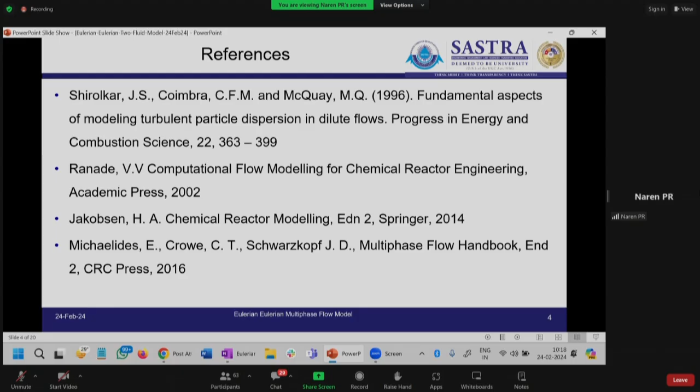With this pre-information, here's a quick outline of what I'm planning for the day. I'll recap the relevance of CFD and what you've learned so far, talk about what multiphase flows are, touch on what Professor Raghavendra covered yesterday about different approaches for multiphase flows, then go directly into Eulerian models, briefly cover what an interface is, and then the framework for simulating the Eulerian model. The idea is to give you a flavor of simulating multiphase flows in an Eulerian context.

So during this course of 5 days, are you fine with the concept of continuum? Do you understand what continuum is? This can be interactive, otherwise I may not be able to see the chat, since I'd have to check it on another system, which I don't want to do right now. So feel free to unmute and speak in between, at least one or two of you. I think the concept of continuum is clear.

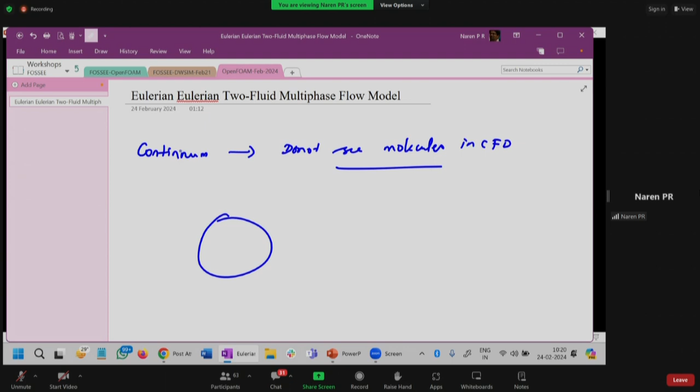So the first thing we should name is the continuum, which means we do not see molecules in CFD. So if you have a system filled with water, that means we see the complete space as filled.

We are not seeing this as molecules. This molecular picture is something that we do not see. This is what is the concept first of continuum.

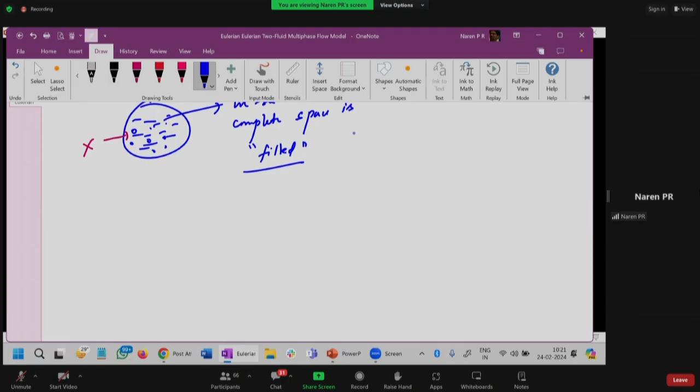So we should know that what we are seeing is actually a space that is completely filled with the matter. And typically we are talking about the phase that is filled with the fluid matter. This can be gas or liquid. But eventually, even for solid, that means we are seeing only continuous thing, right? That's the starting thing which I want to emphasize.

Now, how is this continuum found out? This is by Knudsen number. Are you aware of what this means, lambda by L? Any idea of lambda by L, or you want me to tell what is lambda by L? Yes sir, okay, so I am getting a response, so that's nice.

So that means how is continuum decided? It is decided by Knudsen number. Now one can write as L by lambda or lambda by L. This is like mean free path. And this is the characteristic dimension of the system, right?

Now, based on if Knudsen number, which is lambda by L, suppose if it's much, much greater than 1, that means you have a large dimension and mean free path is very less, then that means you will see it as continuous. That is what happens in the room.

In the room where we are sitting, we see the room to be continuously filled with air, filled with nitrogen and oxygen. You don't see molecules because why? The mean free path is very less. It's the order of 10 power minus 6, 7, depending on, and then the length of the room and the breadth of the room is hugely high, right?

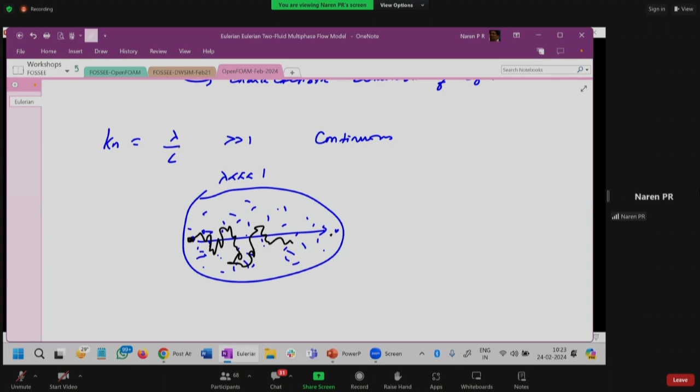So that means before a molecule travels from one end to another end, it will collide with huge numbers. Suppose if you have a molecule here and you want this to reach this end, if the lambda is much, much less than 1, that means there are so many molecules here, so many entities here. So that means this molecule of our interest will collide with so many other particles, and only then we'll be able to reach this. This is what it means, Knudsen number less than 1.

On the other hand, if the Knudsen number is greater than 1, literally greater than 1, which means L is very less than lambda. Is it clear? So that means it is like telling I have a system where here I have one molecule, and then I have a system where the system boundary is so very, the mean free path is very, very large.

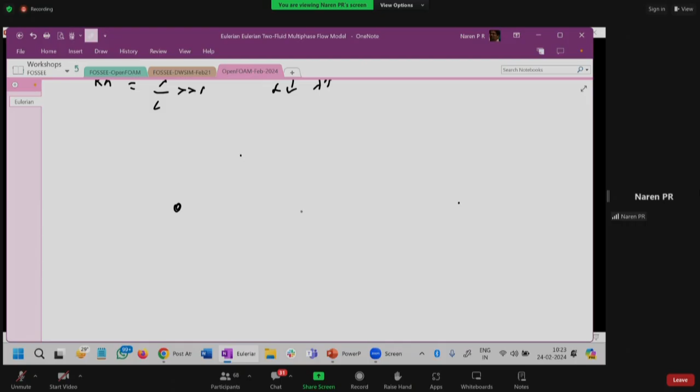So the mean free path is very large and another particle is only here, so that means nothing else is there in between. So that means if this has to reach here and then collide, this is huge distance than reaching this wall. It can reach this wall very easily than reaching another particle. This is what happens in the outer space in the universe.

Like say between two atoms or two molecules, you have huge distance. So that means essentially we will see only molecular scale, we will not see the continuum scale. This is the idea of continuum.

And I'm sure you could recollect, CFD is about transport equation. Transport of what? Transport of mass, momentum, and energy within the concept of control volume. Now, what is control volume? It is an infinitesimally small region within which you are assuming the continuum hypothesis.

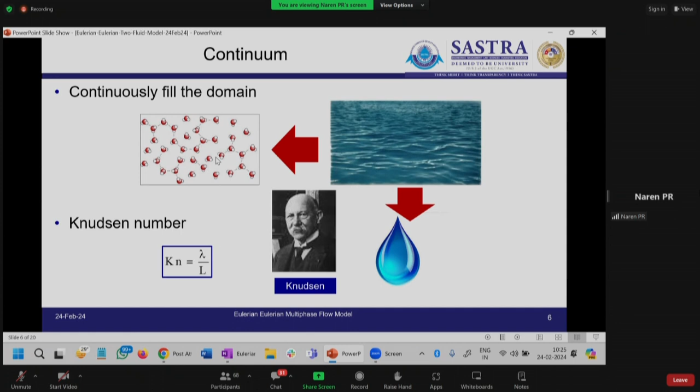Maybe I'll just quickly give an example so that this is clear. Suppose if you take water, okay, now you know water's density is 1000 kg per meter cube. That means 1 meter cube of water will have 1000 kg. So that means mass to volume ratio of water is 1:1000 or 1000:1.

Now, what is it? If I take 1 liter water, what is this ratio of V:M? That is also 1:1000. If I take 100 ml water, then also it is 1:1000. Suppose if I take 1 ml water, 1:1000, right? If I keep reducing the amount of water, do you think this ratio is preserved?

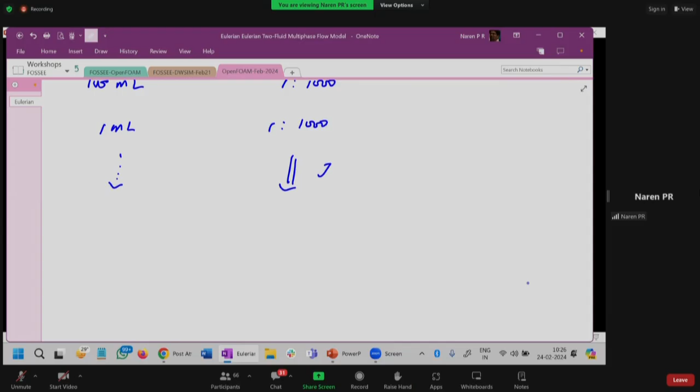No, right, I mean, is that no? So somebody has responded. You can also put in the chat if you are finding it, not many, all people might be comfortable also.

I will occasionally see the chat as well. Somebody has responded very nicely, so this will not get maintained. Why? Because you are breaking continuum after some point. The moment you break continuum, you cannot use this transport equation. I'm not saying those cannot be modeled.

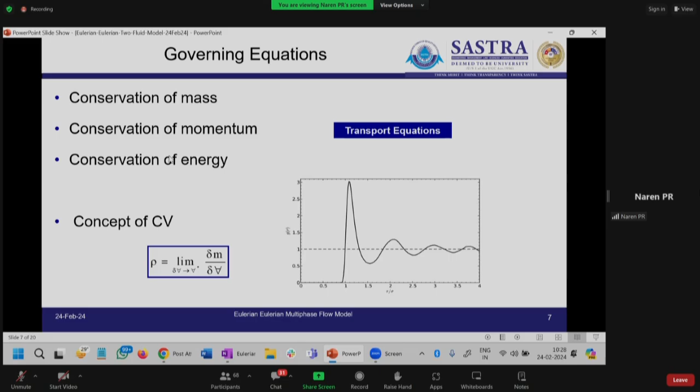Now I presume this is something you are able to quickly recollect. What I have written is a generic form of the equation. Instead of writing three different equations, I have written it as one transport equation.

So I have written it as one transport equation: d rho phi by dt, plus d of rho into velocity times phi, then there is d of this gamma, which is actually the diffusion coefficient, times grad of phi, plus there could be a source term.

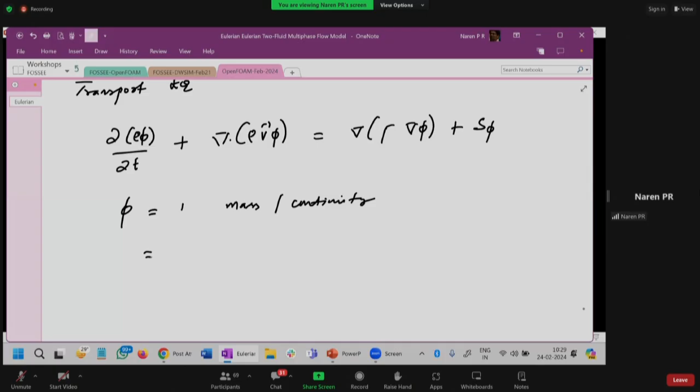Now what I've written as phi, that is 1 if you write mass balance or continuity. This phi is u if it is momentum, and this is Cp into T if it is energy balance. This can be equal to mass fraction if it is species balance. So it is one easier way of representing the equation in one form.

Any doubt in this equation? Are you able to relate to this equation based on what you have seen so far in the workshop? You can chat, I'm actually seeing another system also here, so I can monitor the chat as well. Participants are free to respond in the chat so that it is easier for me to know that what I speak is being received and I'm receptive of the mood there.

Sir, if you have time, please elaborate this equation in a short way. The equation you want me to explain? Okay, without derivation, as I said, I will try to explain this briefly.

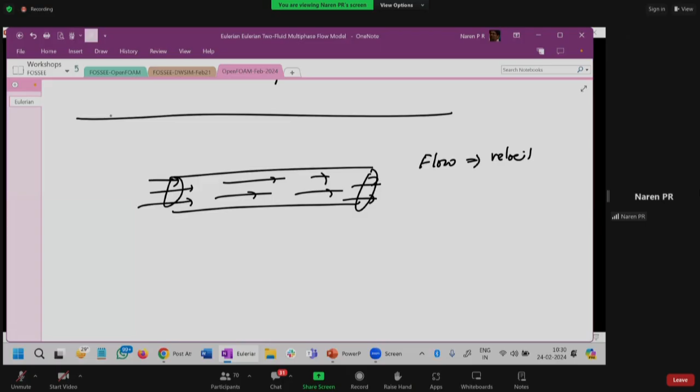Suppose we take a pipe, the very simplest system, and let's say a fluid is flowing through this pipe. We want to understand the flow in this, meaning the velocity pattern, and we want to model it eventually, so that we don't measure it experimentally but model it instead. So what we do is take a very small region in this, what we call a control volume.

Now this control volume does not have any particular shape, somebody can take it like this, anything. But for our flexibility, we take it as a regular shape, like a cuboid, square, or rectangle, because we can write geometry for a regular shape. As such there's nothing saying it should be taken like this, but we take a very definite geometry.

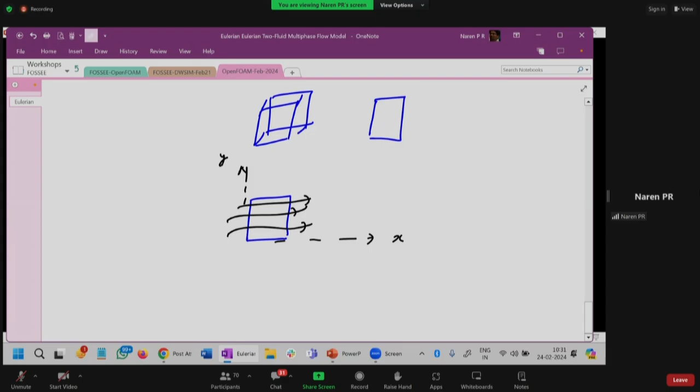And then we see how the flow happens through this part, trying to see, suppose if this is represented in y and x coordinates, can we write equations for this? What equations? We need to write mass balance, momentum balance, energy balance, and if there is a reaction, a species balance. All these are called conservation laws.

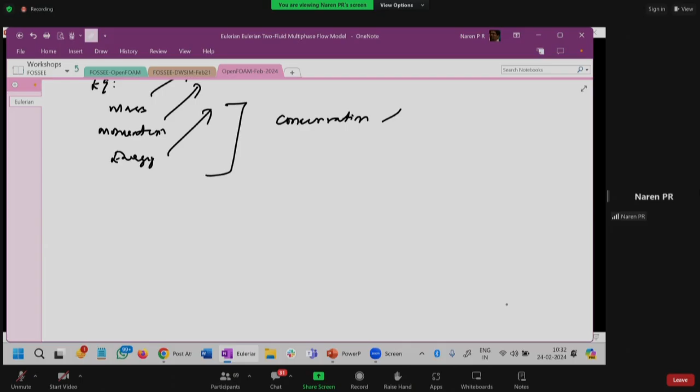So our equations are not data-driven equations. They are based on physical laws of what we have arrived at based on what we have observed in nature, through our experimentation or by virtue of our intuitive observation.

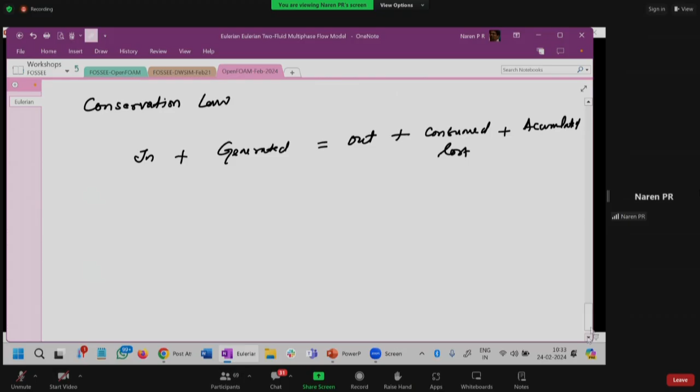This is kind of a low level perception I want to bring in. Now this is at every instant of time. This should be obeyed, and for every small control volume, this should be obeyed. Because it is at every instant of time, this is called rate, that's why there is a dot everywhere - everything is per unit time. It's not that it should be obeyed only for a duration of 1 hour or a block of 2 hours. No matter how you divide your time axis, this should still be obeyed.

Now you take this as a starting point, and then we develop the mathematics of this. I'm not doing the rigorous derivation, but here's how we do this: anything can go inside by virtue of motion - that's what we call bulk motion - or it can go inside because of diffusion, which is because of a gradient. So what I mean by gradient, suppose if you are near a very hot surface, you still feel the heat.

How are you feeling the heat? Because heat is conducted. Is it clear? Heat is conducted through the molecules of, say, air, which hits the hot object and also hits your skin. This conduction is a diffusion process. This is the molecular means of transport.

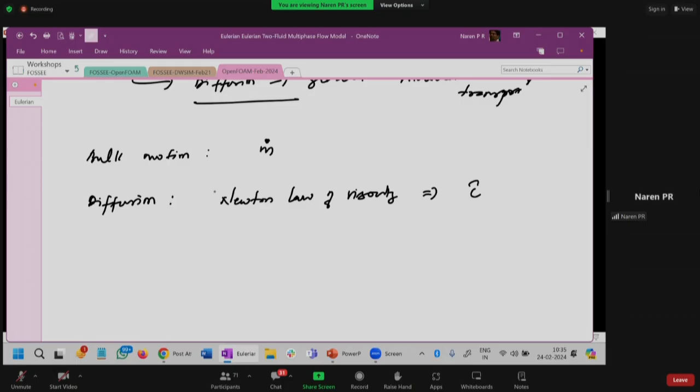Diffusion is captured primarily in terms of three laws. One is Newton's law of viscosity - this is for how shear stress is transported, which is for the momentum equation. Next you have Fourier's law of heat conduction, that is primarily for energy. And then you have Fick's law of diffusion, this is for species. Remember, for mass balance, that means for the continuity equation, there is no diffusion.

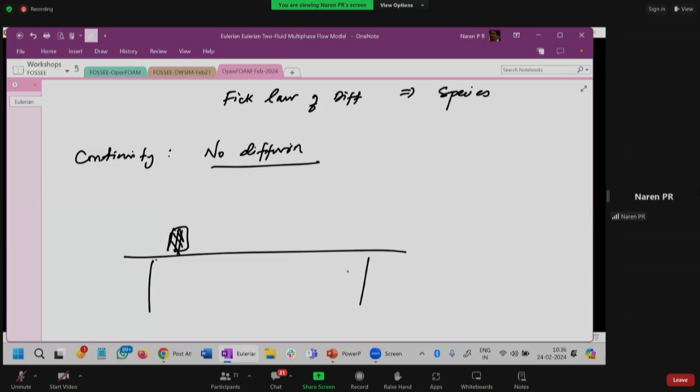What I mean by no diffusion - for example, now you are seeing, I'm Naren and I'm sitting here in Thanjavur. Next to you in your place, Naren is not there. But there is a gradient, right? There is a gradient, but that does not mean I can transport from here to there by virtue of molecules and then get reassembled - if that happens, that's like mythology. So if you have a table here and you've kept some mass here, and here that mass is not there, it is empty - that does not mean this will come here. It will not get transported, so there is no such diffusion.

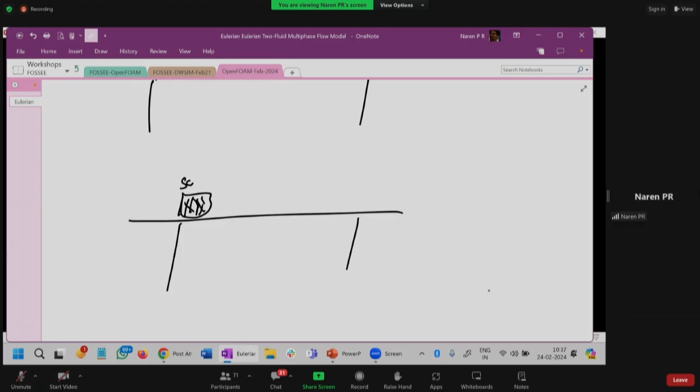Whereas what I mean by species is, suppose if you have a table with a mass here, but this is like a scent - the scent can go in every direction, everywhere else these molecules of scent can be felt, perfume can be felt. That means it is not the mass, it is only a component in that mass that can go. This is applicable to us too - you might recognize somebody by the smell of their sweat. We know if somebody is coming because this person's perfume is there, or a natural body odor is there. That is because the species transfer, not because the mass is getting transferred.

Yes, sir. Yeah. Thank you, sir.

Recollect what you have seen for the last 3-4 days. I'll proceed further. I'm not yet going to multi-phase, I'm trying to bridge you, taking you from single phase to slowly multi-phase Eulerian context so that you can understand Eulerian better rather than directly jumping. Now, first thing is, I want to show you snapshots.

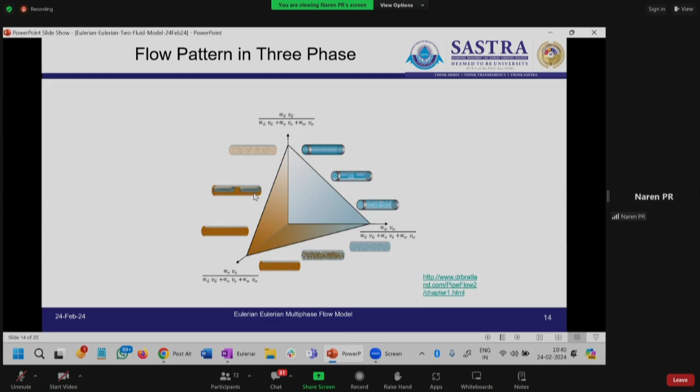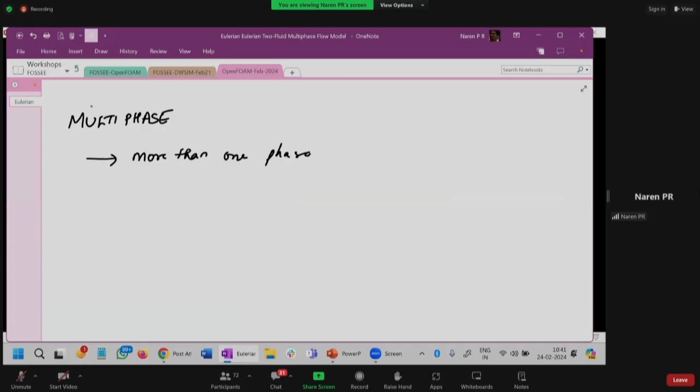So essentially, we are talking about what is multi-phase. Multi-phase means more than one phase flowing eventually or present together. It should be more than one phase. What do you mean by one phase?

This is like a thermodynamic phase, but it's not just a thermodynamic phase - we rather call it here a hydrodynamic phase. It is liquid, gas, or solid. So the types of multi-phase flow we can classify based on liquid-liquid, gas-liquid, liquid-solid, gas-solid. Then we can have three-phase, which is gas, liquid, solid. You can have four-phase, which is gas, liquid, liquid, solid. When I write liquid, liquid here, thermodynamically both are liquid phase, but they are immiscible - they don't mix with one another.

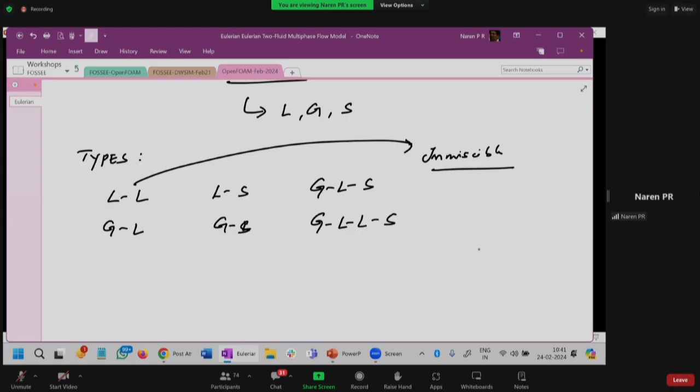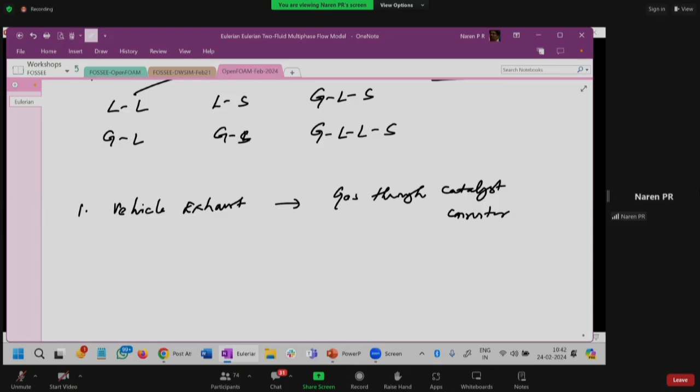Now, as part of any process, can you imagine that there are multi-phase flows? Do you think that there are multi-phase flows? Yes. For example, the most common one - vehicle exhaust. You have gas, which is the combustion product from our engine. It flows through a catalyst bed or catalytic converter, so that we don't send any unwanted or undesirable gases, pollutants, outside. We have converters now, right? This is a two-phase system because the catalyst converter is solid.

This is gas. Where if you think of a boiler, you have water which eventually vaporizes and then exchanges heat, goes to the turbine and so on and so forth. So this is again a liquid, gas-liquid system.

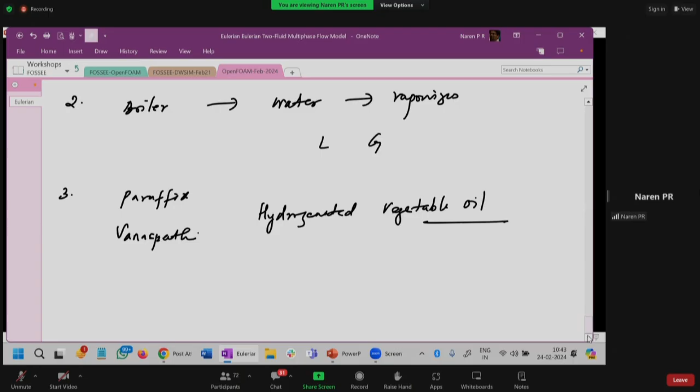A lot of our products - a very simple product, paraffin wax. I'm not talking about the non-food product, but I hope you know there was a product called Vanaspati, which is nothing but hydrogenated vegetable oil. And this Vanaspati is solid, whereas vegetable oil is eventually liquid. And how is this hydrogenated? We have to take the oil and send in hydrogen, with a solid catalyst. And when you do this, this is what gets hydrogenated - all the double bonds, I'm not going into the chemistry, but just telling, all the double bonds get hydrogenated. Like this, we have n number of cases where there is more than one phase in contact with one another.

Now, if you want to design or improve the performance, what do you mean by design or improve the performance?

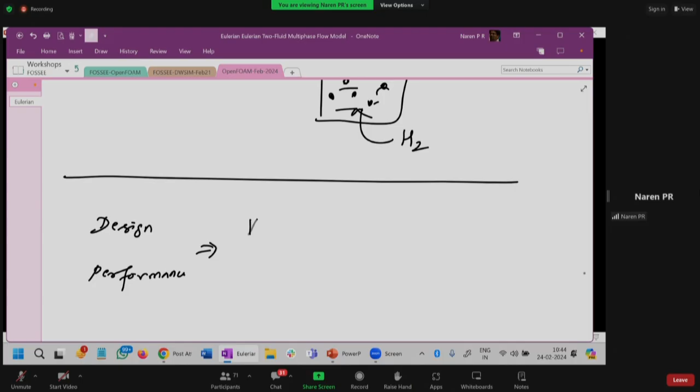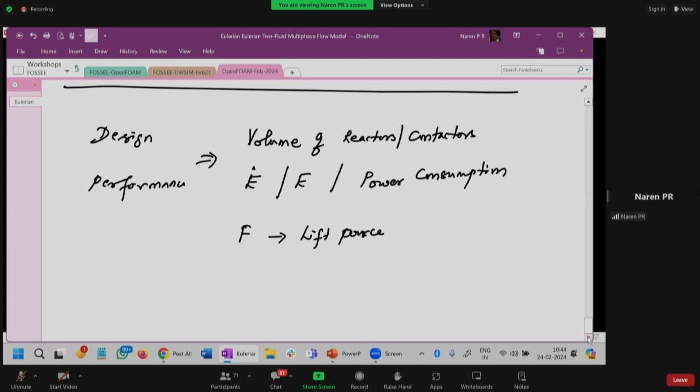If you want to design the volume of such reactors or contactors, or if you are interested in the energy rate, how much energy is consumed or required, what is called power consumption. Or you are talking about force, like if it is aerodynamic, they'll talk about lift force, whether lift is sufficient in that context. These are all engineering parameters which need to be designed, and our work involves enhancing this.

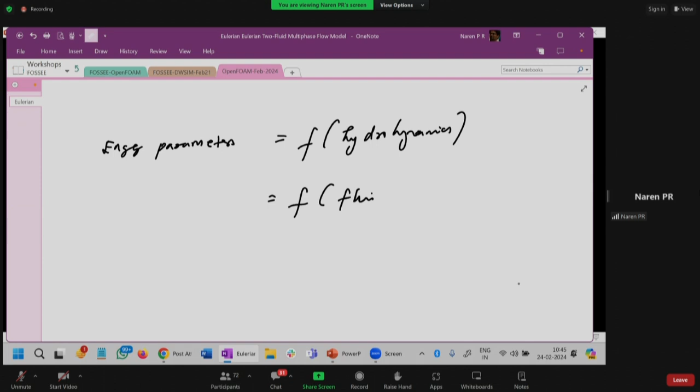Now, if these engineering parameters need to be enhanced, they are a function of hydrodynamics. Now, when I say hydrodynamics, that does not mean it is water. That is how conventionally in physics it is named, which otherwise I would mean these are functions of fluid flow. So that means if you understand the fluid flow, you can get these engineering parameters.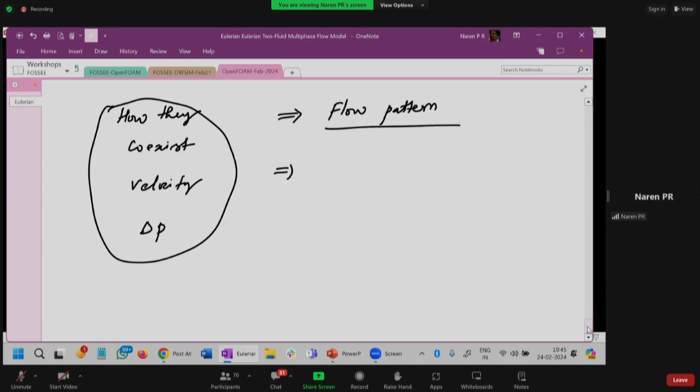What do you mean by understanding this fluid flow? That means understanding flow pattern. Understanding flow pattern means how they coexist, what is their velocity distribution, and eventually what is their pressure drop. This is what we mean when we say flow pattern. So if we can capture this, then we can better design or get our engineering parameters. And if we get these engineering parameters, we can either improve the performance or the design.

So till this point, is that clear? Any doubt? Are you all with the flow? I'm assuming that you are all with the flow. Okay, no sir, go ahead. I got confused. So that means you are all with the flow means no, sir. Okay, somebody has said yes, that's fine. So I'm assuming you are able to understand what we are trying to do with the multiphase flow.

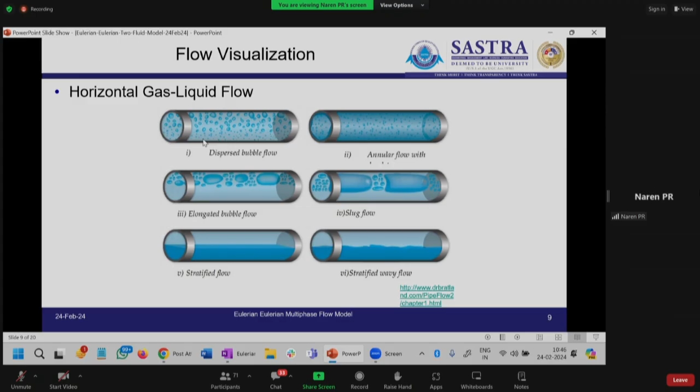What is represented here in the picture is, even for a very simple case of flow through a pipe, if a gas and liquid are co-flowing, they don't have the same picture. You can see in this picture one, it is more of a dispersed flow. Whereas if you see here, in picture five, one phase is going only through the bottom, whereas another phase is going only through the top. This is called stratified flow, or segregated flow. Whereas this other one is where one phase is completely sheared, completely mixed in another phase.

Now, this you will also see in vertical dimensions, when the flow is happening against gravity or in the direction of gravity. We have something like dispersed flow, and this is annular flow, where the lighter phase goes through the center, and another phase goes only across the walls. Each of these flow patterns will affect performance differently. What you get in dispersed flows, you will not get in annular flow, and vice versa. If you want an annular flow in a system and end up designing a dispersed flow, your system is not going to work.

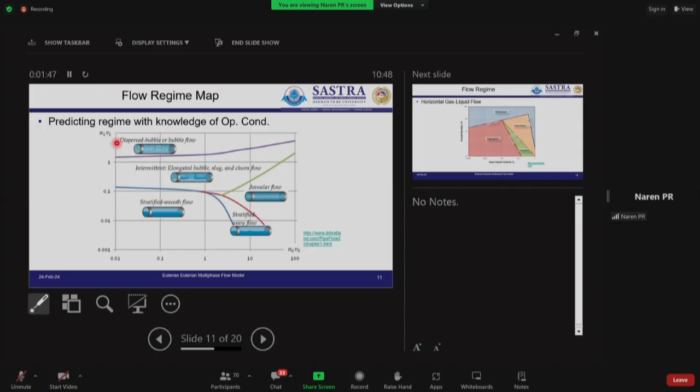And what decides this? Before that, what people did experimentally was try to see when this picture happens. What I've plotted here is actually the mass flux of the gas phase and the liquid phase. So based on the flow rates of the two phases, these keep changing. That means if the flow rate is one value, you have one kind of flow pattern, and if the flow rate is different, it's a different flow pattern. This has been reported experimentally by a number of researchers, and these are called regime maps.

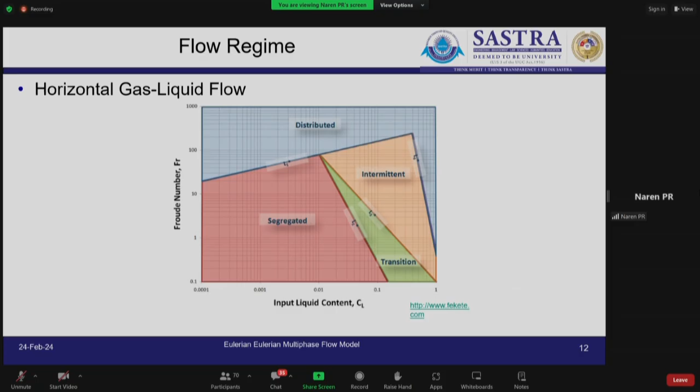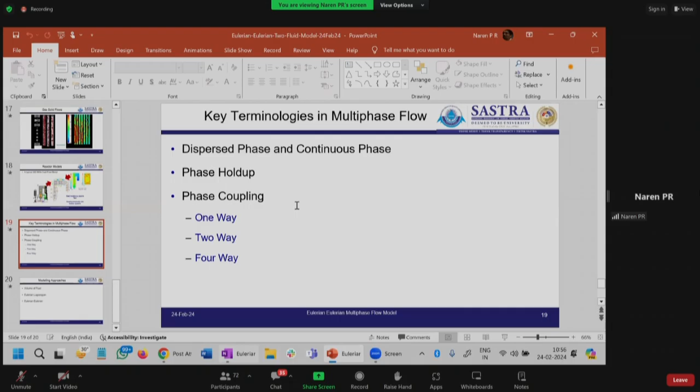Now we move to some key terminologies in multi-phase flow, like dispersed phase and continuous phase. So do you know what is dispersed phase and continuous phase? Dispersed phase and continuous phase.

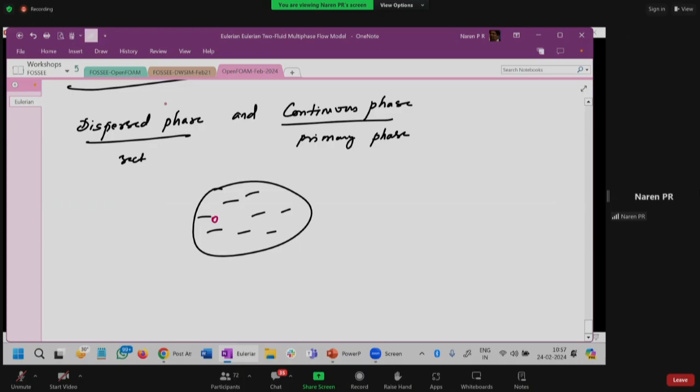Continuous phase is usually the primary phase. This is like a secondary phase. Suppose if you have a system of, say, liquid with gas as dispersed, so that means gas is discrete in nature, only in certain pockets. Otherwise, primarily this is filled with liquid. So in this case, liquid becomes the continuous phase and the gas becomes the discontinuous phase. That is the definition of phase.

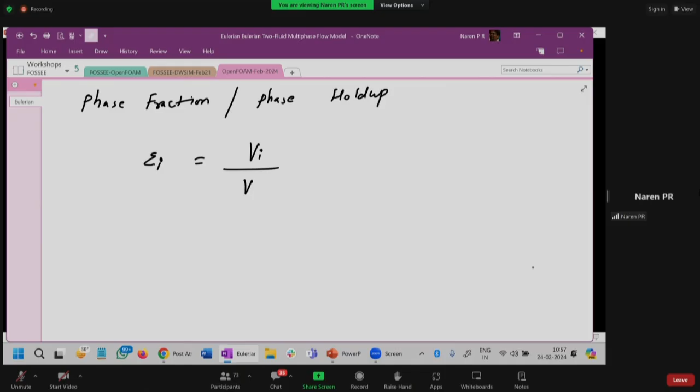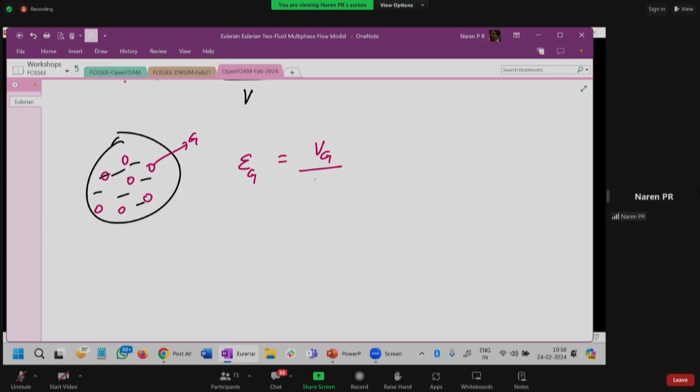The next term you should know is phase fraction, or phase hold-up. What is phase hold-up? It is written by the letter epsilon-i for phase i. It is the volume occupied by that phase divided by the total volume. Suppose you have a system with liquid, and a dispersed phase like gas, the hold-up of gas is the volume occupied by gas to the total volume. Whereas hold-up of liquid is the volume occupied by liquid to the total volume. By virtue of the definition, if you add both hold-ups, it should come to 1, because you only have either gas or liquid in the system. Is this clear? Any doubt at this stage?

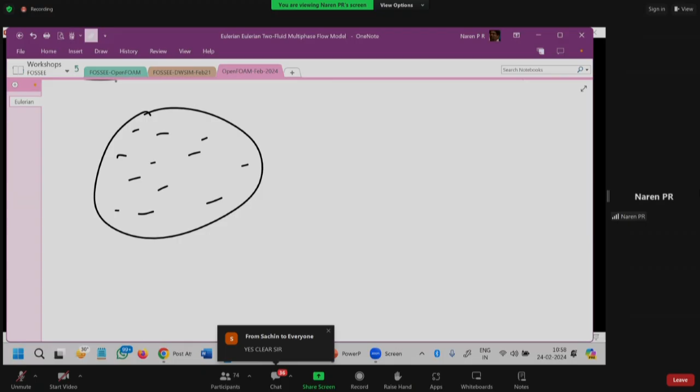The next term we want to see is phase coupling. Suppose you have a system with liquid — it need not be liquid, let's say this is phase 1 and this is phase 2. The question we have is: will 1 interact with 2, will 1 also interact with 1, will 2 also interact with 2, and will 2 interact with 1? In which combinations is this going to get affected? This is what we call phase coupling.

As I said in the beginning, I am keeping all the contents very simple consciously, because I don't want to take another 15 minutes. I hope it is fine for Mr. John — John, I hope that should be manageable, right? Yes sir. The idea is it should not happen, as a teaching philosophy I practice, that I have taught 10 pages and the audience do not know what I have taught. I'm fine if I have only spoken one page, but if that one page is clear to the learners, I'm happy. So it's not how much quantum is covered, it is the quality of information understood that really matters. That is the philosophy in which I have grown up, fortunately or unfortunately. So I am keeping it very simple.

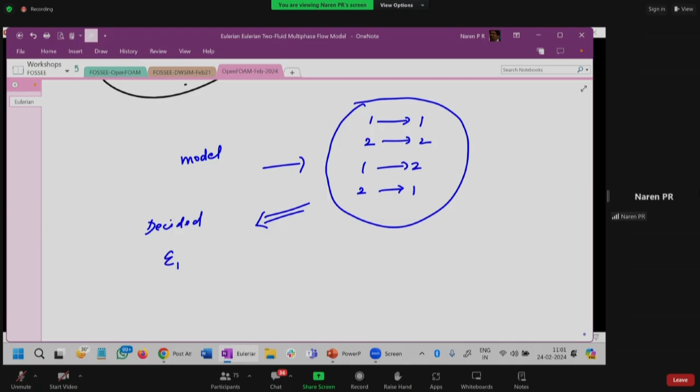So we can model all this — we can have interactions between primary and secondary phase, primary and primary phase. Secondary phase will interact with this, secondary phase will only affect secondary phase, something like this. How is this dictated, how is this decided? This is usually decided by the knowledge of the phase fraction, based on some experimental guidelines or observation.

This is like talking about two kinds of such interactions. If this hold-up increases, say becomes more than 10%, then we'll say gas also will affect liquid, liquid also will affect gas, and obviously there is gas-gas interaction also. This is based on experience, or observation. So just because you do multiphase flow, the computer will not take these interactions automatically — we need to tell the computer what it needs to do and what it should not do. So some knowledge of experimentation and visualization is required.

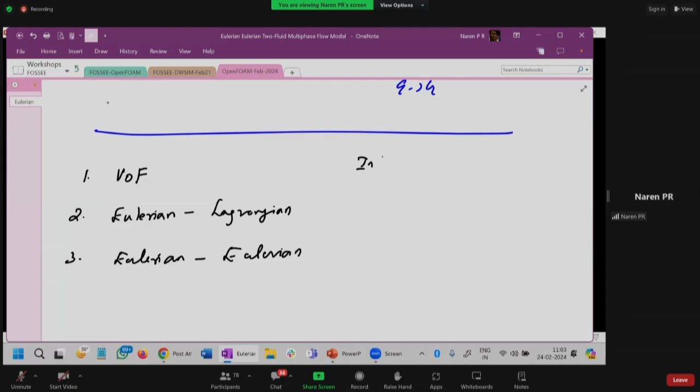There are three approaches — I think he has covered this yesterday broadly. There is the VOF approach, and other than VOF approach, there is something called Eulerian-Lagrangian, and there is something called Eulerian-Eulerian. Here, the interface is tracked; here, every single dispersed phase is tracked.

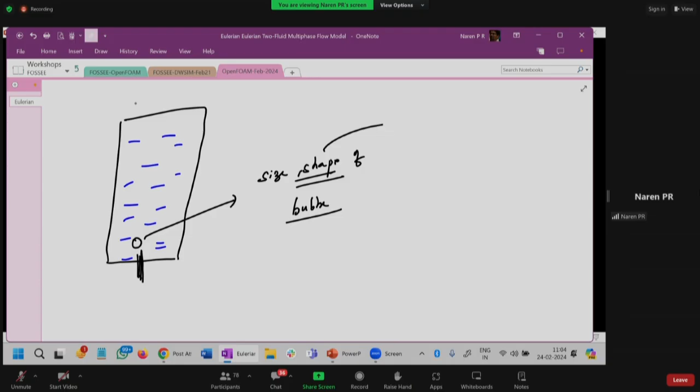Here, only the region is tracked - I would say, volume of fluid model. If you remember yesterday's talk, suppose you have a liquid and you inject through a fine tip one single bubble, and you want to see the size, shape of the bubble. If you want the shape, you need to see the interface - the surface that demarcates gas from liquid. If this is the objective, to know how the shape is changing, then we do VOF.

Now take the same example. Let's say you are injecting a bubble, and it does not mean it has to be injected only once. In the earlier example also, it need not be a single bubble - it can be multiple bubbles also. Just because we drew one doesn't mean it's a single bubble. It can be a single bubble, it can be continuous, or multiple bubbles.

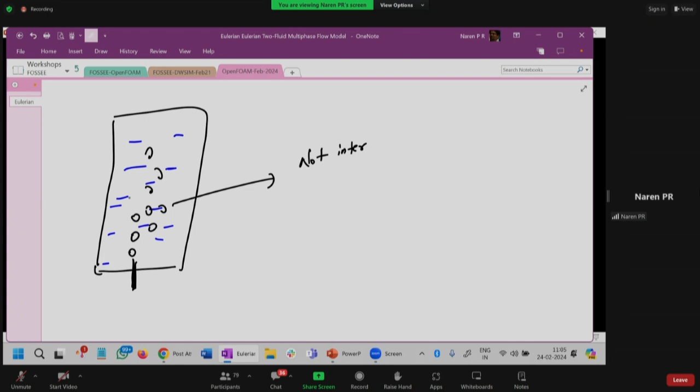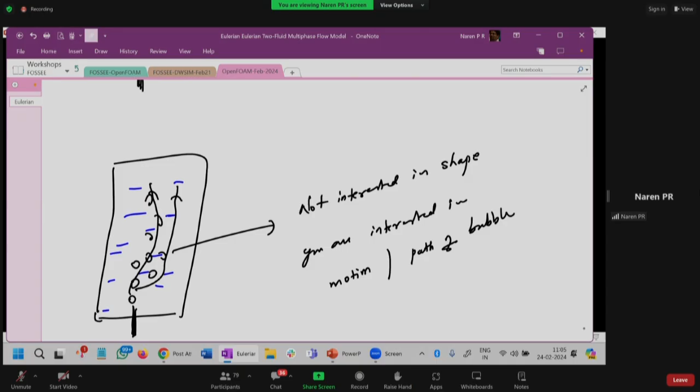You are not interested in shape now. You are interested in the motion - the path of this bubble. That means you do not want to know whether this bubble, which is spherical, becomes ellipsoidal as it moves up. You are not interested in this shape change. You want to know whether the bubble will go this way or that way. It is only the motion of the bubble you are interested in.

This we do by the Euler-Lagrange approach. This is what Professor Raghavendra also told as DPM, discrete phase model. In this case, the primary phase is modeled in Eulerian, and the secondary or dispersed phase is modeled in the Lagrangian approach - that means you track every single bubble or every single particle. What I'm talking in terms of bubble is also applicable in terms of particle.

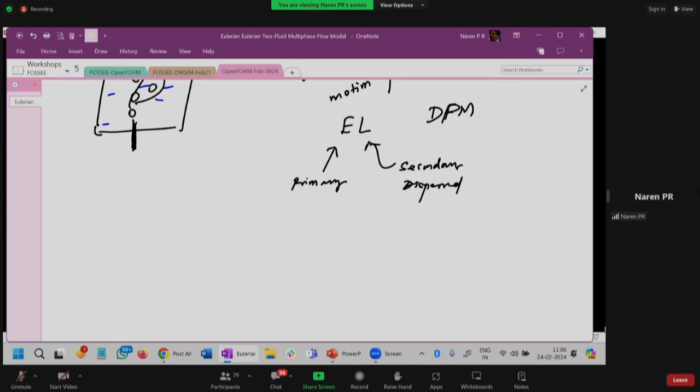Take the same example again - you have liquid, and you are injecting a bubble. This again can be a single bubble or a stream of bubbles, or there can be multiple injections - it's not always single. Now you are not interested in their shape, and you are not interested in the motion of every bubble.

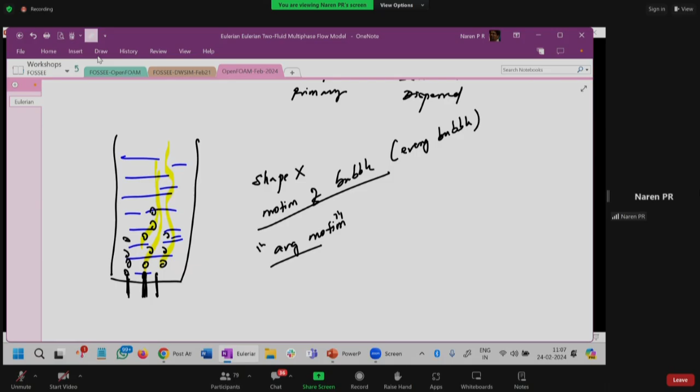What you are interested in is the average motion - of every bubble, but here you want the average, overall, where the bubble is moving. It's like telling that on average the bubble goes this way or that way. I am only interested in the average behavior, not in shape nor in the path of a single bubble. Then we do Eulerian.

Typically, whenever the hold-up of the dispersed phase - D stands for dispersed phase - is more than 1%, the other two techniques are computationally very, very intensive, so we cannot do them. As I showed with industrial boilers, when we have so many parameters, so much discrete phase present in terms of volume, it's really not viable to do by Eulerian-Lagrangian or VOF method. You can only resort to their average motion.

For example, suppose you take sand or mud in your hand and put it down, and I ask you to track the motion of every single sand particle in that mud as you put it down - we would literally go mad. If I take one sand particle and put it down, you can tell how it flows. Maybe with 10 particles you can still see it. But if I take a handful of particles, like marbles or sand, and put it down and ask where everything has gone, it becomes computationally intensive - not possible.

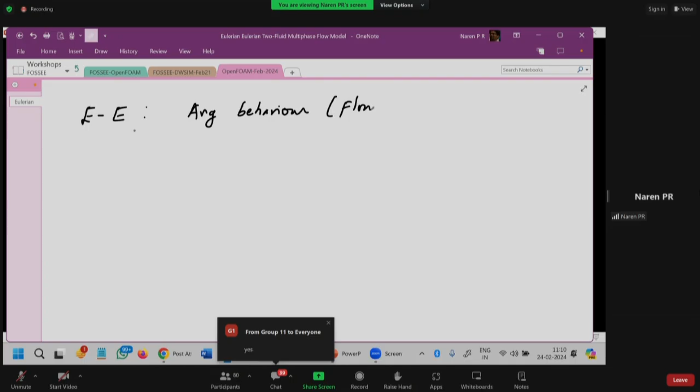But what we can tell is where and how the sand is getting dispersed - we can see the region, but we cannot track the motion of every particle. This is the differentiating aspect in Eulerian flow. So is that clear what we mean by modeling - VOF, EL, and EE? EE tells the average behavior, that means the flow behavior of the dispersed phase.

As it moves through the continuous phase, the continuous phase itself can be static - meaning without motion - or it can also have motion. So I would not use the word 'static' rather, because then 'dynamic' would make the wrong sense here. So this can be batch, or this itself can be continuous.

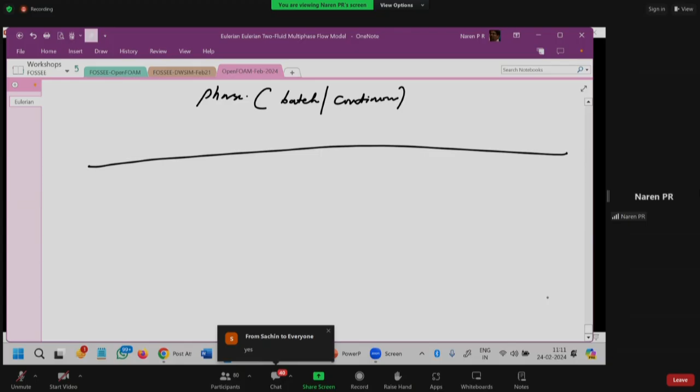What is the focus of Eulerian flow? I'm assuming everybody is with me and able to understand. Then let's come to the mathematical model.

The mathematical model, at least visually, is very, very simple. When you look into the equation, it is very simple. What is it for single phase? For example, the equation I wrote for single phase is like this, plus this is the accumulation term.

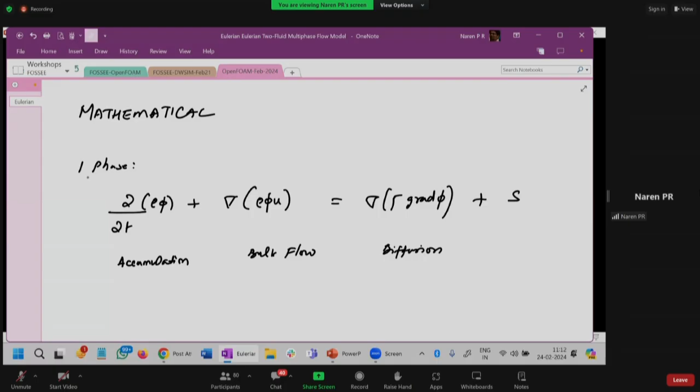Next, you have the bulk flow term, written like this. Plus, then you have the diffusion term, written like this. Plus any other source term - source term is for consumption or for production. This is for single phase.

Eulerian eventually tells that there are two phases - that means phase 1 and phase 2, or what we write as continuous phase and dispersed phase. So the same equation has to be written twice. No change in this - this is exactly the same equation.

Only thing is now this has to be written two times. One you have to write for the continuous phase, so I'll put everything here as C, C, C - everything is C. And another, for D, which is for the dispersed phase. So visually, when you see it, there is no change.

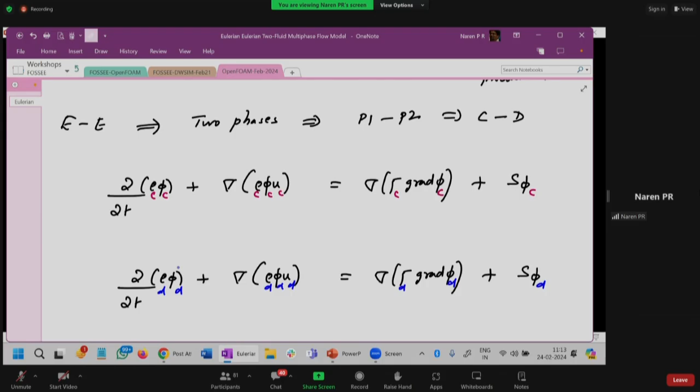But is this correct at this stage? It's not yet complete, because you have two equations - that's fine, one for continuous and one for dispersed. But are they connected? What I mean is, we said in a cell - when you divide this into grids, in every cell C and D can be there, because C and D can coexist.

That is what you are saying - it can coexist. But are the equations now connected by what you see on the screen? Have I connected those equations, or have I only written them? It's like two equations discretely written. They don't talk now - this talking is not established.

How do we establish this talking? It is through a term. One way is to account for their presence, and that is done in terms of adding a phase fraction as part of this - adding not only this term, but adding a phase fraction. So that means it is rho C, epsilon C, and then phi C.

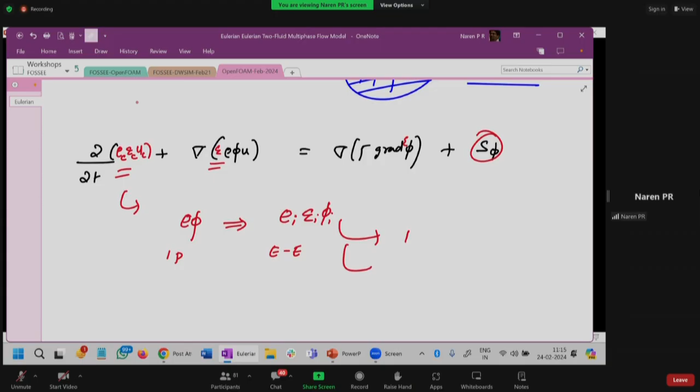So everywhere else, epsilon is to be added. Now epsilon is added here, and in this explanation epsilon will come. So essentially, epsilon is added - that means you don't write like rho into phi, which is for single phase, whereas for Eulerian I write rho of phase, epsilon of phase, and phi of this phase. This phi of the phase, as I said, is 1 if it is mass balance. If it is continuity or momentum balance, it is velocity. And if it is energy balance, it is specific heat of the continuous phase and the temperature of the continuous phase.

So that means essentially we are coupling through the phase fraction. The other term which connects these two equations is the source term.

Now, what is the source term in Navier-Stokes? If you remember your single phase Navier-Stokes - I am not writing it completely now - you have this momentum balance, then the bulk flow term, then the shear stress term, plus pressure gradient and body force term. These are all called source terms for the momentum equation.

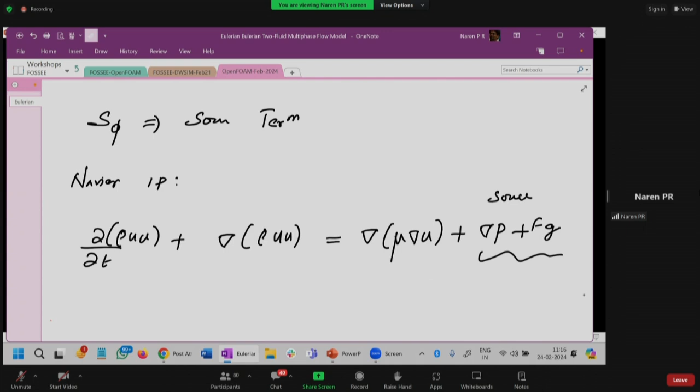Like this, in Eulerian-Eulerian, what are the source terms in the momentum balance?

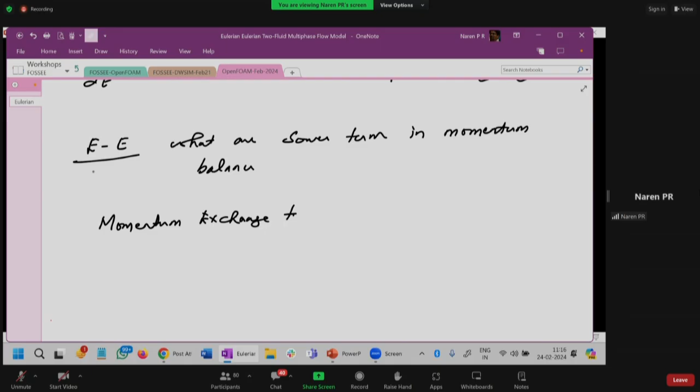The source terms in momentum balance are called momentum exchange terms. These exchange momentum between the continuous and dispersed phases. They are equal and opposite, meaning if momentum is lost by the continuous phase, it is gained by the dispersed phase. Each of these source terms is usually modeled with respect to a coefficient and as a function of slip velocity, so there is a momentum exchange coefficient, and slip velocity is the difference in velocity between the continuous and the dispersed phase. The question comes, what are these? Is there any name for this?

Yes, and most of you would have already known this. For example, drag force is one such momentum exchange force. Lift force is another momentum exchange force. We have many such forces, like virtual mass, and something called Brownian force.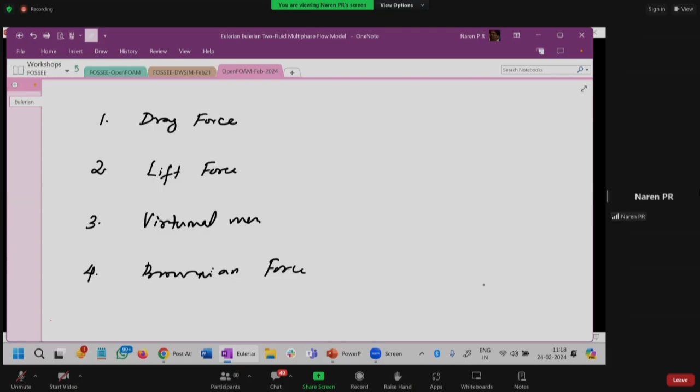Also Basset history force. Now if you look at the drag force, which most of you might be at least familiar with, this drag force is equal to a drag coefficient times the mean kinetic energy, usually based on the continuous phase, and the kinetic energy is based on the slip velocity. And the projected area of the dispersed phase, that means this is based on the size of the dispersed phase.

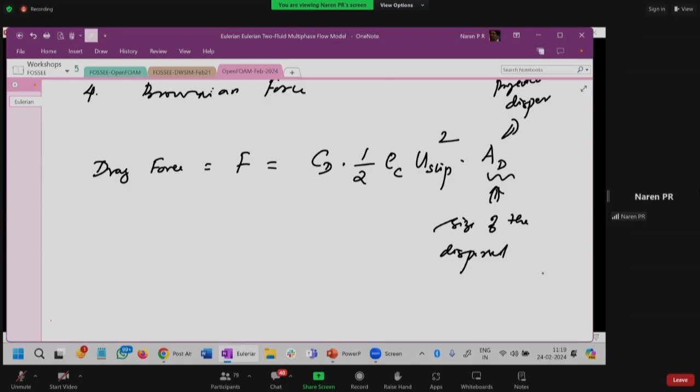Size of the dispersed phase, and this is where the size of the bubble or the particle comes in. This drag coefficient, there are experiments which were already done and modeled. This drag coefficient is given as a function of Reynolds number of the dispersed phase.

Reynolds number of the dispersed phase - what do you mean by that? It is the diameter of the dispersed phase times the density, where density is usually taken as the continuous phase, times the slip velocity, divided by the viscosity of the continuous phase. So the linear dimension is actually the diameter or characteristic dimension of the dispersed phase.

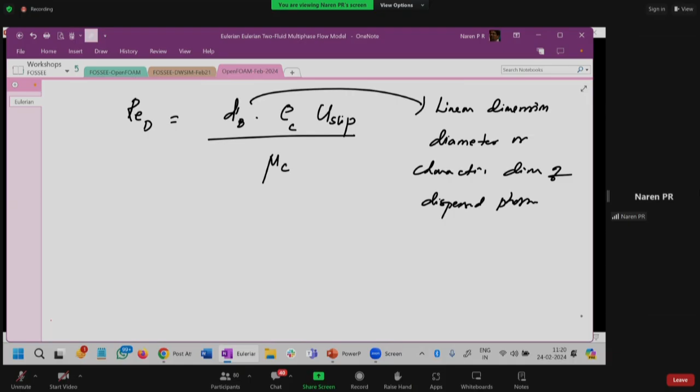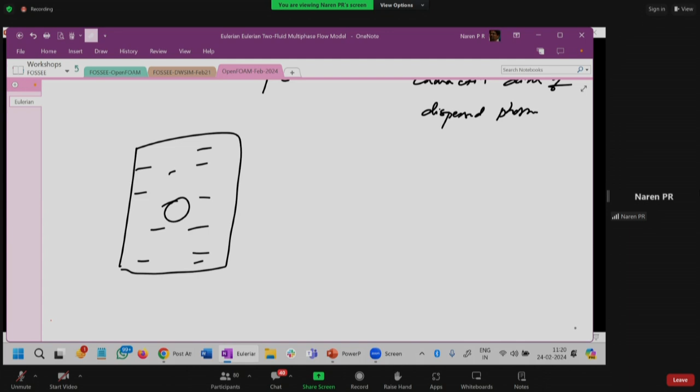Now we need to enable this - at least we need to enable one, and primarily drag will always be there. Drag is because of the virtue of the pressure, the normal stress difference between the two phases that is happening. So if you have a system with your liquid, and let's say if you have a bubble rising, this side and that side have a difference in delta P - usually higher here, lower there. So that means there is a drive, something is pushing the bubble up. It is not only buoyant force and gravity force; there is another force at play.

I'm not going into the explanation of drag, but I would help you reconnect to the famous thought experiment - I'm not sure whether it was a real experiment - that Galileo put balls of different material from the leaning tower of Pisa and observed. I'll put it in the chat later. I think this was done recently, in the last decade, in a vacuum chamber at NASA, where they showed that a feather and a ball reach the ground at the same time if drag is not there. It is only because drag is there that the feather will not reach the ground and the ball will probably reach faster. So that is shown, and eventually that is the drag force - this drag force is one source term.

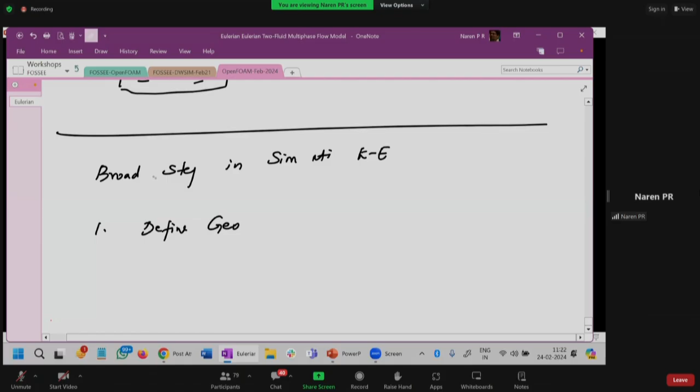So with this, for the sake of brevity of time, and to give some practice, I would just give the broad steps in simulating Eulerian multiphase flow. First, you have to define the geometry - by now you know how to draw the geometry or import the mesh and define it. Next, you need to enable multiphase flow.

You need to tell that you are following the EE model or the Eulerian model, of which there will be one primary phase and one secondary, dispersed phase. It is not alone sufficient - usually you will tell whether gravity is acting or not, whether you want to include energy balance or not. If you enable temperature, that is energy balance, otherwise not. Then you will tell about the viscosity model - whether it is laminar or turbulent. I'm not going into the turbulence of multiphase flows again for brevity, but this is not enough - you need to enable all the source terms, meaning the momentum exchange.

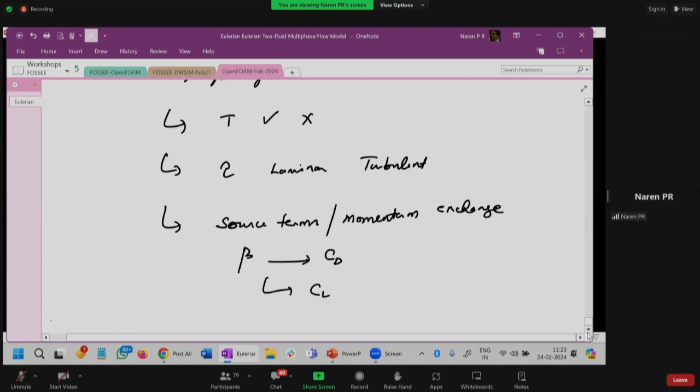This momentum exchange coefficient means we need to define beta. One such beta is the drag force, but you can also do this for lift force, virtual mass. For every such force, there is one coefficient. This we need to enable. If you don't enable it, the system will not understand that it is a multiphase flow.

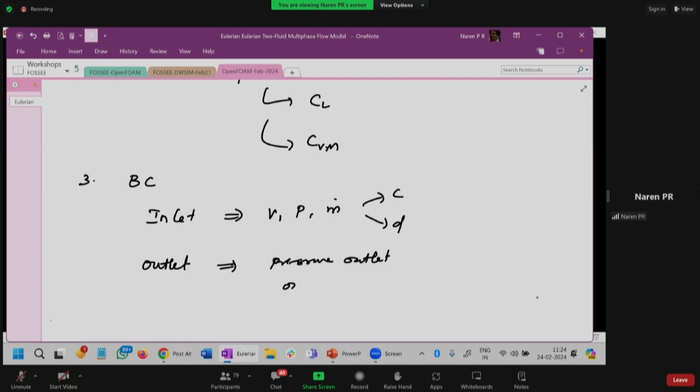The next step after defining the model is the boundary condition. There's no major change. If it is inlet, you either give velocity, pressure, or mass flow rate, and you can give it for both the continuous phase and the dispersed phase. Outlet is either pressure specified, or we call it outflow. So that means we say the outlet is at 1 atmosphere, something like that.

Walls are typically given as no slip if it is a fluid system. Only if it is a solid system are there some other treatments, which I'm not covering now. So both for the continuous phase and the dispersed phase, we need to specify no slip.

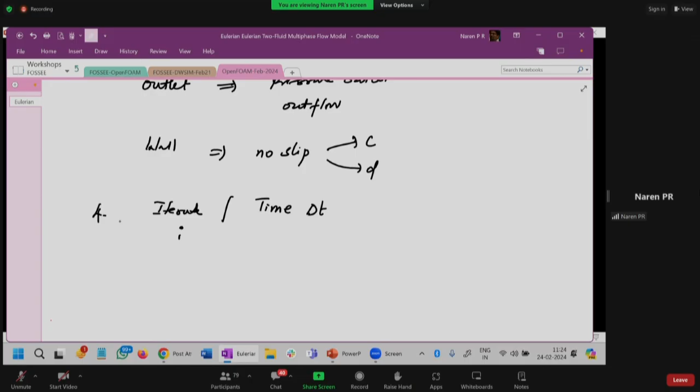And then you need to iterate. That means it can be a steady state simulation, or if you're going for the time domain, you specify the time step and the iterations, and then look for convergence. So the only difference here is you need to include this momentum exchange factor.

I forgot to add, when you enable this multiphase flow, we need to specify the size of the dispersed phase. Because, as I said in my talk, this dispersed phase size governs the drag coefficient.

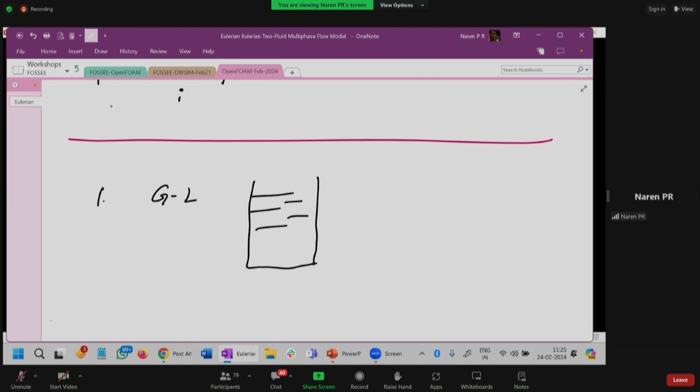What Mr. John has planned is you will do typically two simulations. One is the same as yesterday, a gas-liquid simulation where there will be a region initially filled with liquid, and you just patch a region. Remember, in Eulerian, it is not a bubble, it is a region patched. So that means it is not one bubble, it is like that space is completely filled with gas or air.

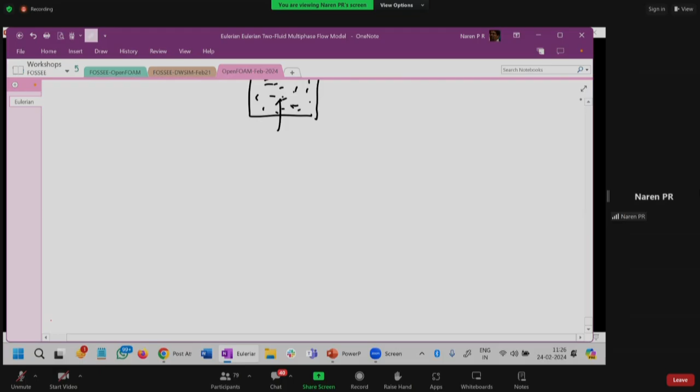The next simulation he will show, or you can practice, is gas-solid, where you will fill this now with particles, and then sparge air from the bottom. So if you sparge air from the bottom, that is what is called a fluidized bed, and you see what happens here.

Anything else, Mr. John, should I cover now? I think this is fine, I suppose. Yes sir. So you will be available if they have any questions? Yes, till around 12:15 or so, at least I will be available.

Participants, I do understand you might have a lot of queries, but I just want to know, at least have you got a fair idea of what Eulerian is doing? Yes sir, I got the idea. Right, and there might be a lot of questions, but that's fine.

The idea is just to experience what Eulerian is, how it is different from a VOF simulation. Remember, we are giving the size, but that does not mean we are giving a bubble. We are saying that region has gas, that's all. We are not saying that region has only one bubble, it can be like 1,000 bubbles also. We are not seeing an entity, we are seeing only an average region. It is like asking where all there is bubble.